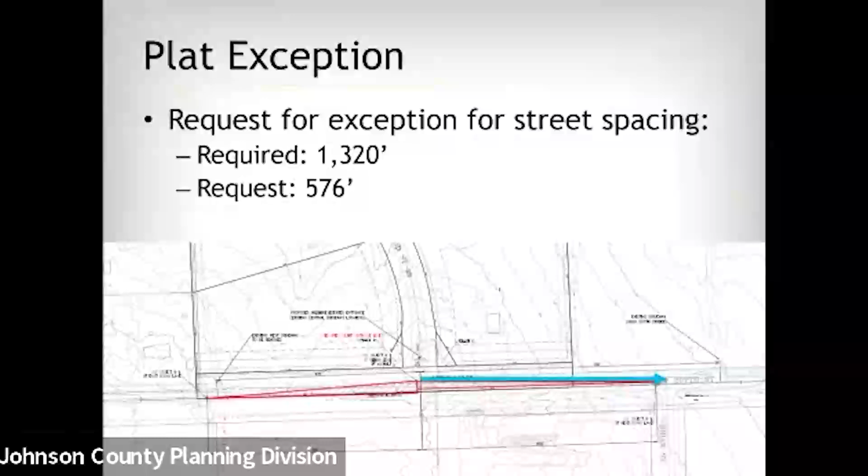We did receive 2 comments regarding the project. You have a printout of the one in writing, which is not in support of the project. I also talked to somebody on the phone about the project, and they were in support. Staff recommends approval of the rezoning from RUR to PRLD, and the second motion, staff recommends approval of the preliminary plat for 14 residential lots to be called Wilshire Estates, with stipulations outlined in the staff report.

You do have one slight modification to one of the stipulations. Under recommendation for the preliminary plat, stipulation 1D, we're requesting just to remove 'and pond' from that stipulation. That's okay with both the applicant and Public Works staff. I have 2 recommended motions for you to use if you see fit, just including that slight change to stipulation 1 with the recommendation for the preliminary plat.

I can answer any questions, and the applicant is also here. Thank you, Michelle. For clarification, the stipulation change, is that on page 11, item number 1D? Page 11, recommendation number 2, stipulation 1D, just to remove 'and pond.' Gotcha, thank you.

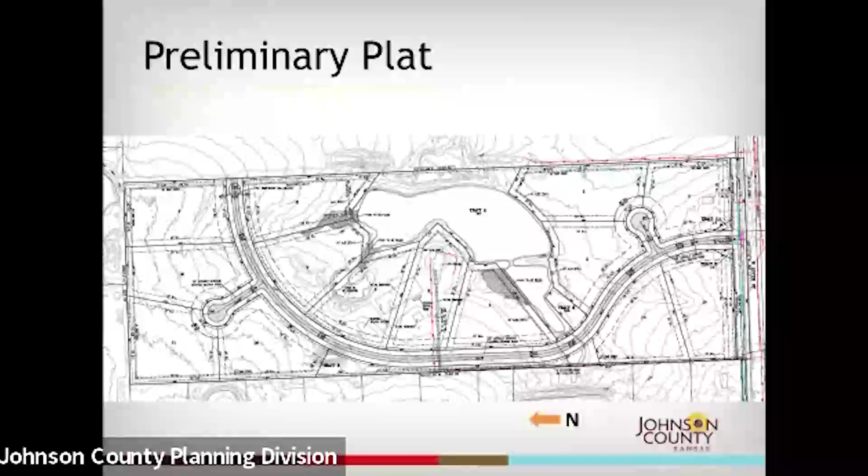Of the water. Okay, okay, thank you. I will let the applicant answer that. We'll ask the applicant on that one.

Okay, you've answered my question on the fire access. I assume this is not a gated community, because I know in the past we've had situations where we got into this, only they were longer cul-de-sacs that created some issues. Obviously it always raises a question if you can't get through with the fire engines, although they're pretty good at pushing stuff out of the way. Hard to imagine what could occur, but you never know. I think it's worth considering — something that, as the new zoning code is looked at, is another area worthy of some consideration. But it sounds like it meets the current requirements, so.

Any other questions of staff at the time? Ken, have any there? I've got one, Ken. Okay, please go ahead. Scott Ballantyne — on page 6, under roads, subsection D.

I notice on there the application does not meet this requirement on D. Is that being addressed, or is that because 207th has plans to be expanded in the future? What's going on with that one?

That is included as a stipulation of approval with the fact that they have to expand their half of the street to meet that standard. On the one side? On the one side. Okay.

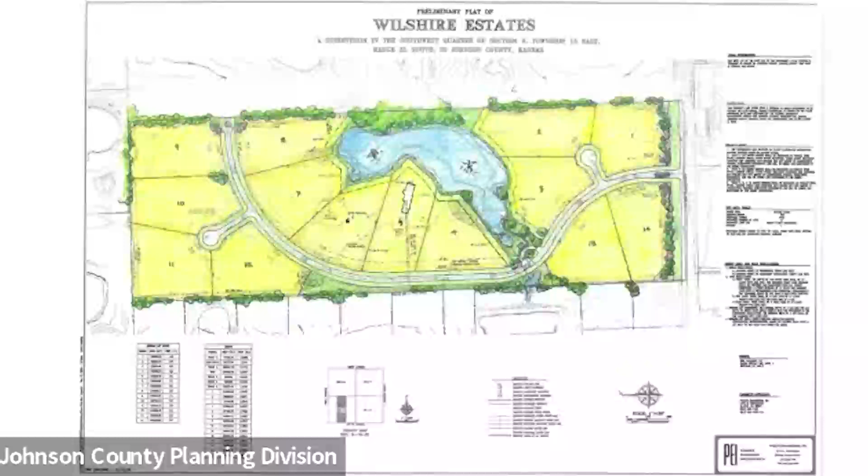That helped actually with our exception. On the road exception, if we really can't meet the road requirements anywhere, we put it on this property. But at this location, we feel like, and staff agreed, that this was the best location for it. It's at the top of the hill, it's where the existing driveway is, and we meet the sight distance requirement for Briar to the south. So this all made a lot of sense.

We are providing connectivity to the east so that when and if the future available property to the east develops, we're connecting to that and we're not creating a dead-end situation. I know we're going to have some arrows on here, but that kind of works out good too.

The question on the island, Mr. Richardson, I think was we didn't really address it. It is a single entrance, but we are putting an island on the entry, so if there is an accident at the entry, it should only block one lane. So we should have access into the project.

The other thing that we have not typically seen in the county are amenities. This project will have an amenity in this area that will be lake access for all the residents. So just because you don't live or abut the lake, you'll still have access to it. So just some of the things giving a little more consideration than some of the other projects that have developed in the county, which set it apart.

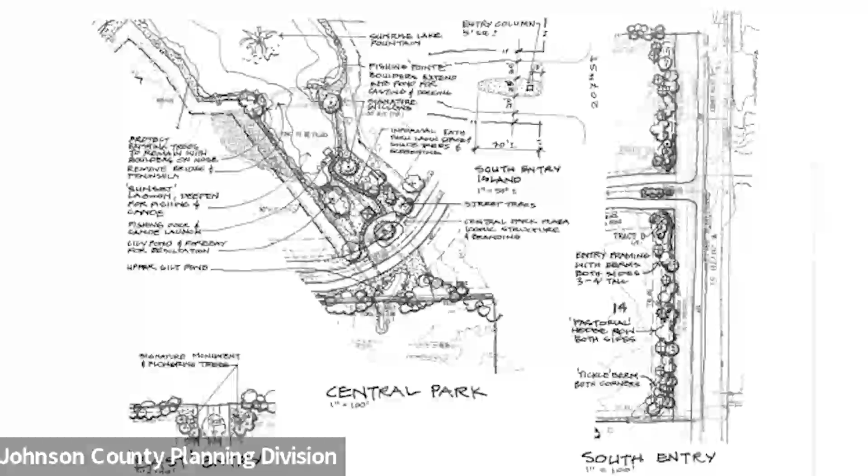The only other thing I'd like to add is on fire. I think Sean did cover this. International Fire Code is a maximum of 30 lots on a single entrance unless there's a plan for future development. That varies—Overland Park is 50, so they've adopted a number of 50, but I believe Johnson County is International Fire Code, so that's 30 lots. Eventually there are 3 or 4 tracts to the east of us that someday most likely will develop, and this will all interconnect and tie back down into 207th Street, and there'll be additional access. With that, I'd be happy to answer any questions you might have.

Thank you for that. Mr. Chairman, Rod Richardson—just out of curiosity, and you may not know, but I'll ask anyway—do you have a vision for the size of the homes that would be located on these lots?

Obviously I can look to Jeff and Chris, and I know what kind of homes they build. They are both builders, and not to say they'll be the exclusive builders, but they'll all be 5,000, 6,000, 7,000 square feet. They'll be substantial houses.

And the only reason I ask that is I think it's becoming evident that there are more and more—I'll just call them substantial homes. There's one next to me that's 12,100 and some square feet. That's a rarity, but it's becoming more evident. Having been involved with the fire district for 25 years off and on, it raises the question of the kind of needs the fire districts have for the type of equipment necessary in the event of a disastrous fire or fire control or whatever.

The minimum infrastructure requirements were reviewed in the staff report. Schweitzer Road is a type 1 county route, requiring a minimum of 330 feet of street frontage per driveway. Lot 1 and 2 have 1,033 feet and 453 feet of street frontage onto Schweitzer, so they meet that requirement. However, 199th Street is a type 3 county route, requiring a minimum of 1,320 feet of street frontage per driveway, but the frontage is only 1,020 feet, so there's access control all along that lot on 199th Street since it doesn't meet the requirement.

A sight distance study was submitted by the applicant and reviewed and accepted by Public Works. In terms of right-of-way dedication, Lot 2 will have right-of-way dedication because it's less than 600 feet, and regulations also require a minimum 600-foot spacing from intersections, which is shown on the plat.

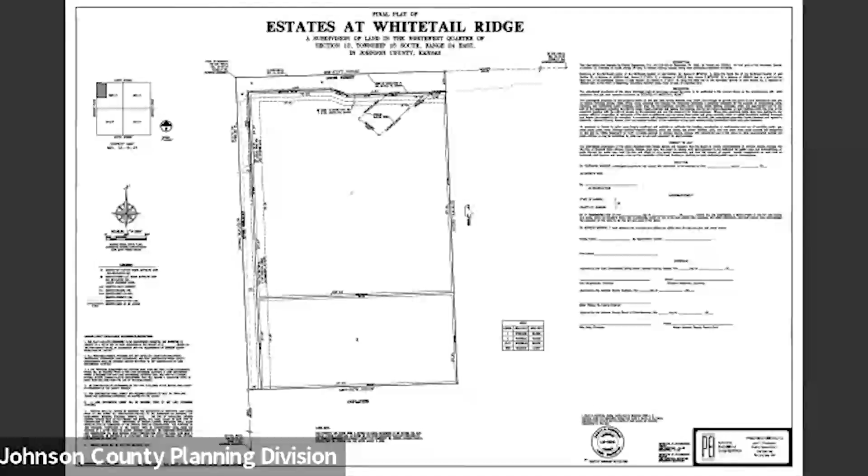So the plat does meet all the subdivision and minimum infrastructure requirements per the regulations. Therefore, staff is recommending approval of the preliminary and final plats for this 2-lot plat, subject to the stipulations shown on page 9 and 10. We do have a very minor typo to correct on stipulation 5C, on page 10, and I've included that in the motion. It says Water District number 7, but it's actually Water District 1 - just a clerical error. And with that, the applicants are here and I'm available for questions.

Thank you, Diane. I appreciate that. Any questions of staff related to this application? I think you said this, but no traffic study was required for this, was it? That's correct. Any other questions? Thank you, Diane, appreciate that.

If the applicant's here and like to say a few words. Hello, Mr. Chairman, members of the board. I'm Mike McGrew from Phelps Engineering. Excited to be here alongside Aaron Phelps, as well as Brett Hand from Whitetail Properties. We just want to say that we are in agreement with the stipulations as they're shown in the staff report, and that we're open and available to any questions you may have.

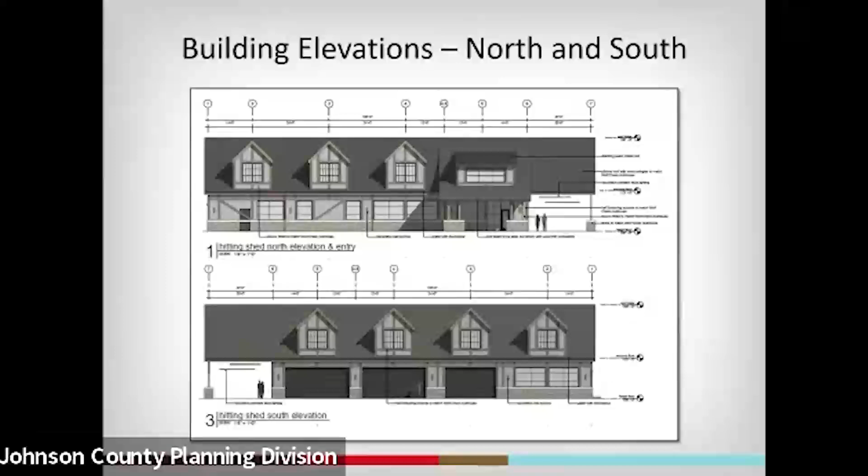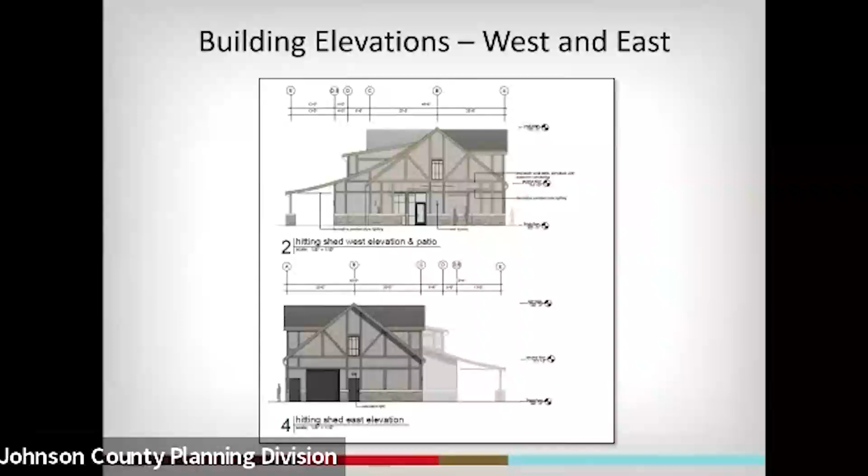The top building elevation is the west elevation with the patio facing towards the driving range. The bottom building elevation is the east elevation facing the residential area, which has more of a residential feel with gable roofs, similar in architectural style to residential structures.

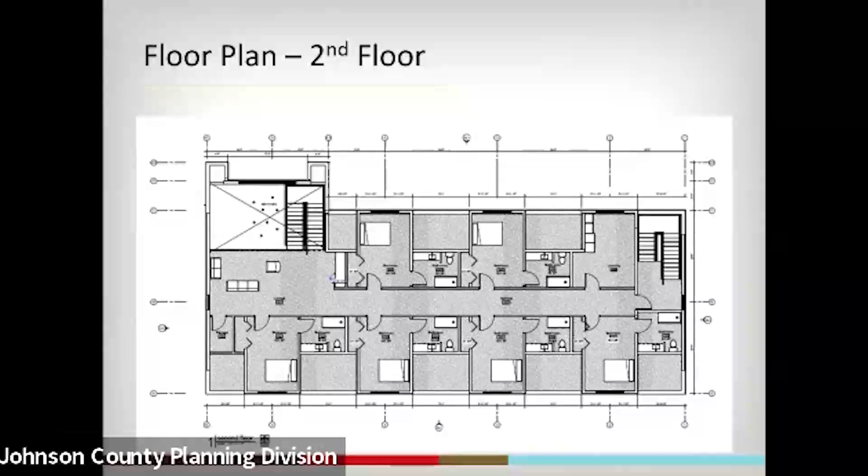As part of the conditional use permit, staff reviewed the minimum infrastructure requirements, consistent with what was previously approved for the existing CUP. Water is provided by WaterOne in this area. Wastewater is provided by Johnson County Wastewater. There are stipulations included in the CUP for the sewer connection that will need to be provided for the new structure.

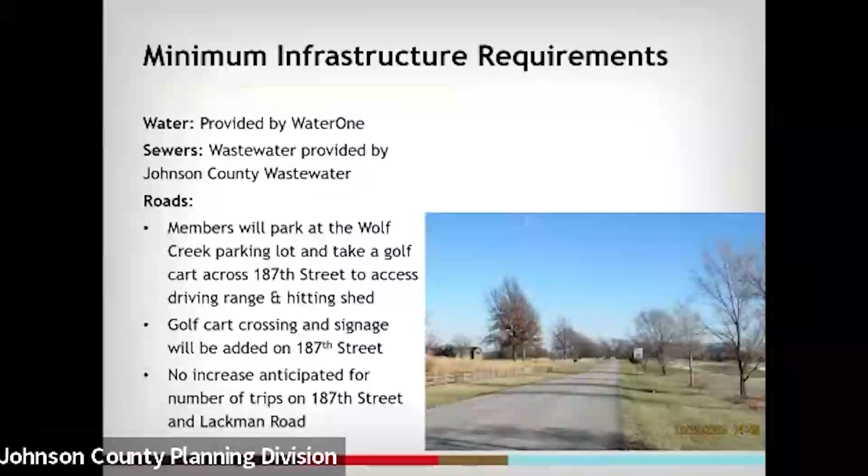As far as roads, there were no requirements for any road improvements because members will park in the existing parking lot at the golf course and take a golf cart across the street to access the hitting shed and the business retreat. There will be signage and a crossing installed along 187th Street. There's no increase anticipated for traffic on 187th Street or Lackman Road, since this is already an amenity as part of the existing golf course. This won't be open to the public.

The applicant held a neighborhood meeting for the proposed CUP on December 18th. Approximately 20 neighbors attended. There were some general questions regarding landscaping and who could be contacted if there are any late-night disturbances associated with the business retreat. The applicant provided responses at the meeting, explaining that the golf clubhouse would be open for any neighbor concerns, and reiterated that only club members and invited guests would be allowed to stay in the structure. Any disturbances would not be tolerated, and membership could be revoked if there were issues.

We looked at zoning again from the land use impact perspective. This is a zoning map showing the current zoning. The property is zoned RUR with a conditional use permit, and most of the surrounding properties are also RUR, agricultural, with individual large lot residential. There is also the existing RN1 single-family residential neighborhood to the east, but otherwise it's mostly RUR surrounding the property.

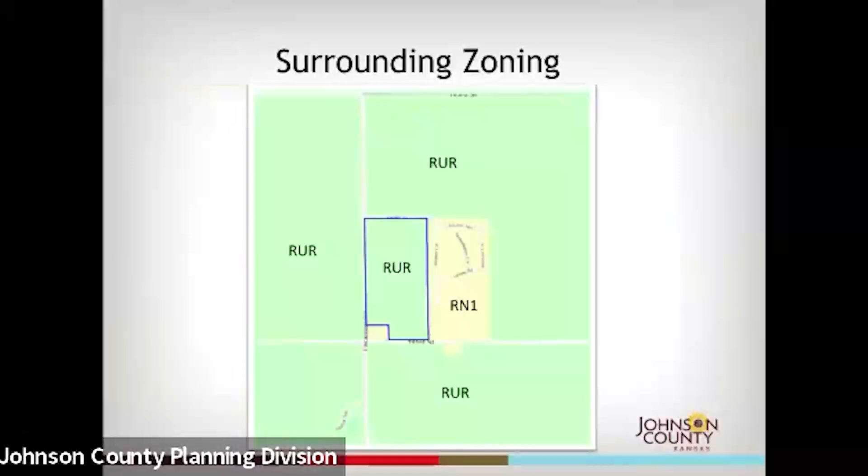Staff also reviewed the Golden criteria, looking at land use impact for this development. Generally, there are other accessory structures allowed in the rural zoning district, and this particular proposed development has an architectural style consistent with the clubhouse and residential style of the neighborhood. The hitting shed would be at least 130 feet away from the nearest residential property.

Staff recommended that the conditional use permit would be appropriate, given that it is consistent with the zoning of nearby properties, subject to the recommended stipulations. We also looked at the compatibility and character of the surrounding area. The driving range maintains a large open space, and the hitting shed design will be consistent with the architectural design of the surrounding area.

There have been no known complaints that staff has received from the golf driving range or the business retreat on the existing property. For suitability, the property is zoned RUR. There is an existing CUP that's been approved, and permitted uses, including recreational uses, are allowed with a conditional use permit.

For extent of detrimental effects, that was the one staff wanted to look at very carefully, because this is a different use located close to existing residential. There are potential detrimental effects that could be associated with this, with the possibility of additional noise from increased activity with having guests stay on site. But those potential impacts could be mitigated by certain factors, which the applicant has already provided, with extensive landscape buffering and landscape berms with new trees planted.

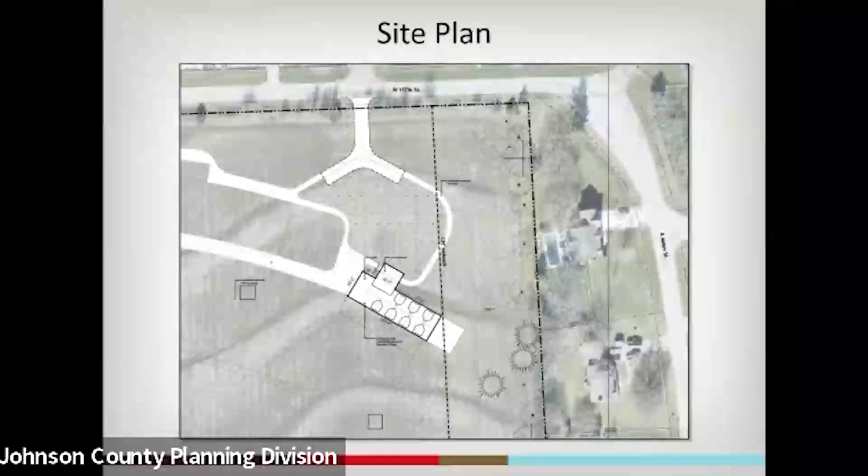I am not aware of any concerns from the fire district or our building official regarding access. I think that entrance existing today off of 187th Street is pretty considerable, and I would imagine would have plenty of access for emergency access. That was a discussion the applicant could probably answer better, but there was a discussion with the building official about emergency access, and they did satisfy those concerns, if I recall.

They had no concerns from the building official and fire district about ingress or egress to the proposed structure, with the stipulation that the fire hydrant is installed. If it meets the code, it meets the code. My only concern would be the limited possibility of extricating somebody out of there with that distance, because you have to get back and forth to the fire trucks and stretch hoses. If I was there and had a heart attack and they had to carry me out in the snow, it may not be that easy. But I just raised the question as to whether it was discussed, and you've answered that it was, or at least considered.

The only other question I have is exterior lighting on this building. The lighting is not changing from what was currently approved with the CUP. That is minimal lighting, with some wall-mounted light fixtures on the building that are down fixtures, no additional lighting. So it was the same lighting specs as approved with the current CUP. The only other site lighting would be bollards that may be located along the golf cart path for path lighting only, about 48 inches in height. It'd be low down lighting. No other lighting would be provided on the golf driving range with this proposal.

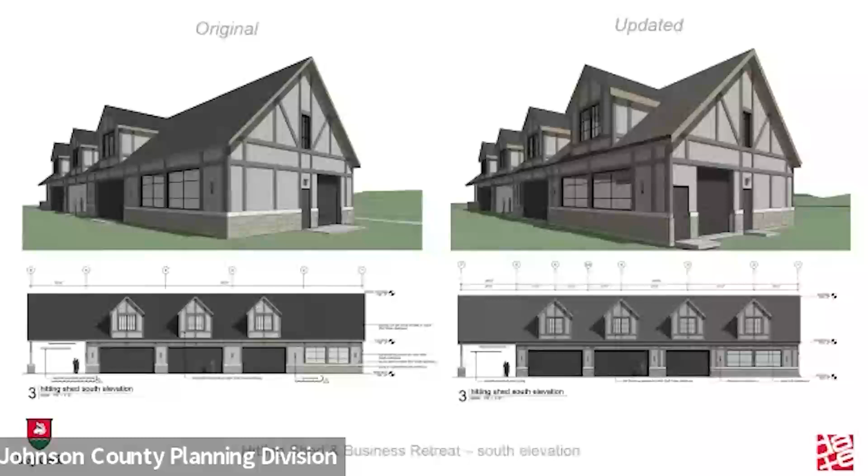The lighting that was shown in the original one is still there. The same high quality materials and elements are there. And again, on this side, the patio is staying on that same side. There's been some design refinement to the roof a little bit, adding that second story window. That was kind of done regardless actually of this additional use, but to just again make it look even nicer than what had originally been proposed.

So again, it looks substantially similar. For the neighbors, we want it to function substantially similar. And it's just, again, another great investment by Wolf Creek into the course in the area. And with that, we have some additional members that are here to answer questions, or I'm happy to answer questions about the design or how things will function.